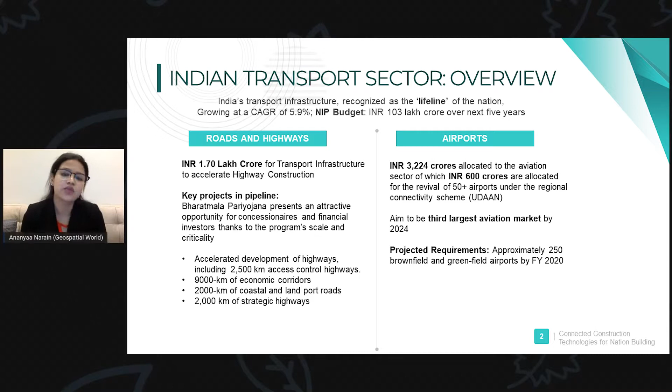Going forward, as part of our research we found several industry challenges. 45% of projects today are over budget, so cost is a major challenge that Indian stakeholders and project owners face. Then 86% of projects are delayed, something we keep hearing about. Apart from that, due to issues in the planning and designing phase, 30% of construction work today requires rework, which takes significant time and results in more costs and delays in delivering projects.

As mentioned earlier, material wastage is one of the core aspects: 25% of materials in the Indian construction sector are wasted, and all of this together impacts productivity, with 55% of Indian construction job sites found to be unproductive. This means quality and productive construction has been a consistent challenge in Indian highways and airports, from project conceptualization to operations and maintenance. Despite its prominent stake and importance to the economy and society, the sector's performance lags tremendously behind other industrial sectors like manufacturing.

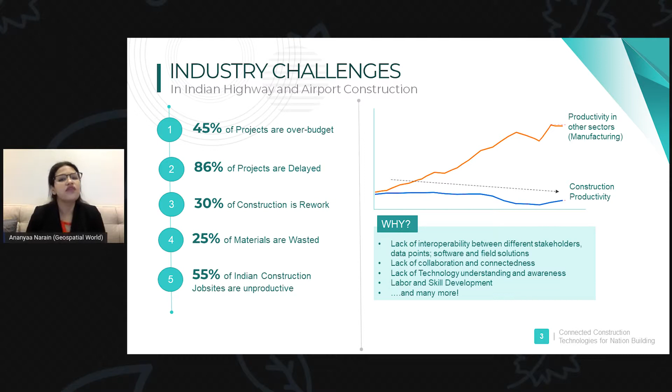So why does this happen? It happens because there's a lack of connectedness, lack of collaboration, lack of interoperability. While technology is one of the core focus areas of the government today, there is still a lack of technology awareness and its value proposition, and of course many other challenges such as skill development, labor challenges, and safety challenges. So all in all, today there is a need for connected construction solutions, or data-driven connected solutions. Next slide, please.

What is connected technologies basically? It's when a data-driven connected technology ecosystem is created, wherein all construction-related information is at one place in real time, available to all stakeholders. This means there's a continuous flow of data, including geospatial data, BIM data, project and timeline data, machine and equipment data, project delivery data. All of that comes together in a common data environment, enabling stakeholders to connect and collaborate on one single platform. That platform acts as a whole system in itself, where collaboration takes place and challenges can actually be mitigated.

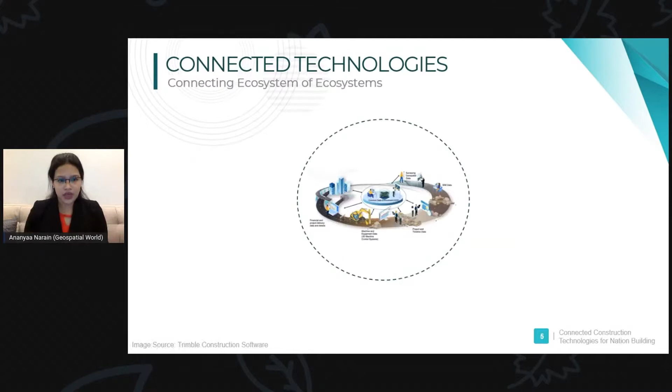But what does this mean? How do the stakeholders come out? We have project owners in the whole workflow of highway and airport or any other construction process. We have project owners, design and engineering firms, service contractors, industry consortia, material suppliers, operations and maintenance people, prefab and modular construction suppliers. All of these stakeholders need to be connected on that one single platform, on that one common data platform, so that decision making becomes easy. And with that, there are multiple technologies.

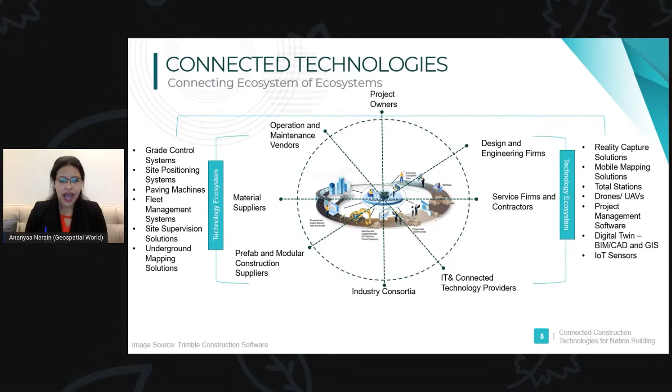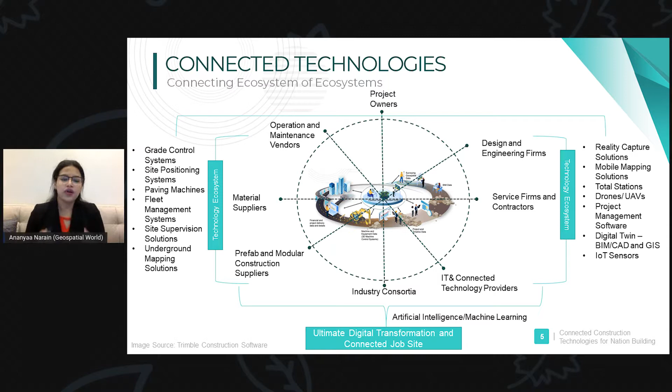For instance, on your right and on your left, there are 3D machine control systems, as well as geospatial technologies, BIM, digital twin, site supervision solutions, underground mapping solutions. Data from all of this comes together and is synthesized using AI and ML solutions to develop an ultimate digital transformation model for the construction job site. So when all of this comes together, connected technology is basically an ecosystem of ecosystems. It's an ecosystem of stakeholders, an ecosystem of technology providers, and all of them come together to make for a collaborative and connected environment.

Now, quickly getting into what the benefits and ROIs are. We have seamless communication and collaboration - that's what connected technologies ensure. There is better and more informed decision making, given that everybody is on the same platform. They can interact, they can talk. There is no loss of data, and decision making becomes simpler. Project delays are less, costs are less, reworks are less. Sustainability becomes a very important component, and there is real-time data sharing and minimization of risk.

Following that, we have about 12% of time savings on using connected construction technologies, about 20% of cost savings, and at least 78% increase in accuracy. These are a couple of benefits and ROIs which are critical, which a stakeholder will derive if they use connected construction technologies.

We live in an amazing place, in an amazing time. Someone should make a highway that floats in the sky. There's never been a more opportune moment to plan bigger and accomplish more than ever before. I think we should live in buildings that change every season. Doing more is the opportunity that the teams at Trimble focus on every day, and occasionally all night. Delivering an ecosystem of construction-ready solutions and services that align all efforts, expertise, and resources available, from survey to design and construction through operation, with continuous optimization. So you can document the unknown, foresee the unpredictable, and assure the best outcomes possible. Because when you have the tools to capture context and share data, you can move the machines. You can remove all the obstacles. You can craft a confident path forward to carry the next plan forward. Someone should invent a way to see the whole world in just one day. In our field, there's only one better feeling than to see a brilliant plan become the next modern marvel. And that's the opportunity to say yes. Yes, I did that.

Hi, a very good morning to everyone. Thank you, Ananyaa, and the panelists so far for setting a great start for the day with crucial insights into the state of construction and infrastructure development related to highways and airports. We're about to begin this session on technology breakthroughs for efficient and accurate architecture and engineering design. I'm Kashi Rajan, Industry Manager for AEC and Digital Cities of Geospatial World.

As emphasized by our renowned panel members in the introductory session, the need of the hour is focused towards precise engineering techniques followed by sustainable solutions, resulting in asset longevity and performance assessment. Needless to say, the adoption of technologies in this regard comes with its own sets of challenges, from digital transformation strategies to human resources required to interweave these technological solutions into the present project workflows. Recent studies indicate that 66% of the construction companies in India suggest that digital transformation and data-driven solutions need to be prioritized.

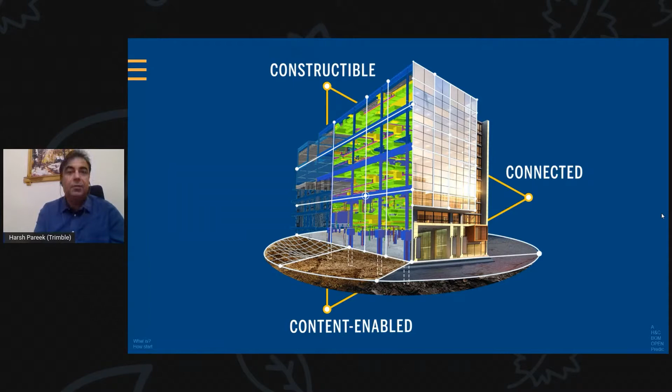I'm just going to share some examples of what constructible means. So you talk about constructible, and let us see a digital prototype of this bridge deck on top. This is a composite structure which has a lot of steel component, a lot of concrete component, and what goes inside it. Like recently I've seen some advertisement saying what goes inside nobody sees, but actually it matters a lot.

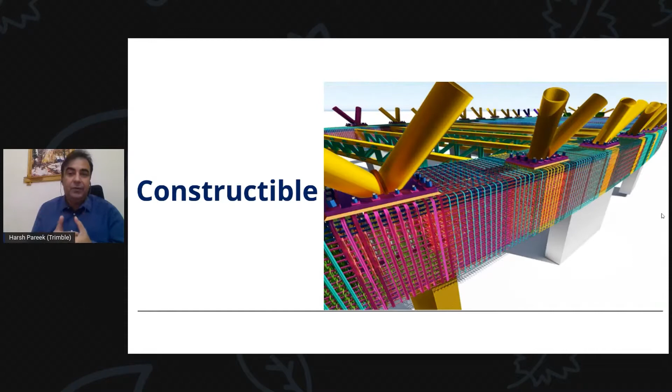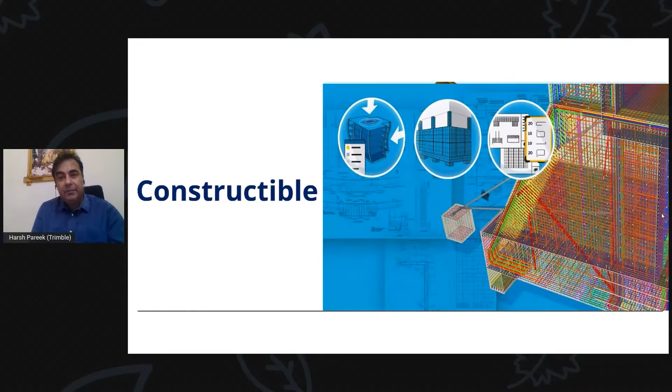So when we say constructible, what it means it is not just about having a 3D model, it is about what goes inside the 3D model, and that is what basically ensures the quality and safety of our projects. So this is one example, and it basically allows us to do all the safety measures, cost measures, and good planning around the execution, and generate the documentation required for proper construction execution.

And that is why we call this constructible BIM. I think BIM is a very generic term nowadays, everybody uses it, but the right way of putting the data across in a construction form is what I call constructible BIM.

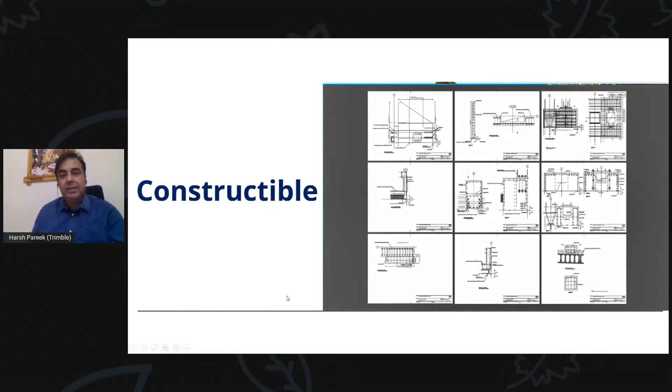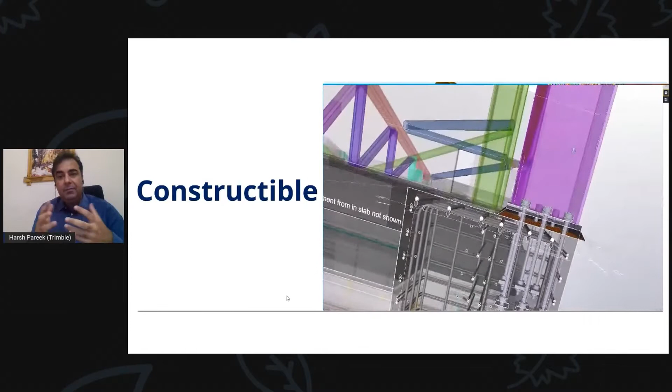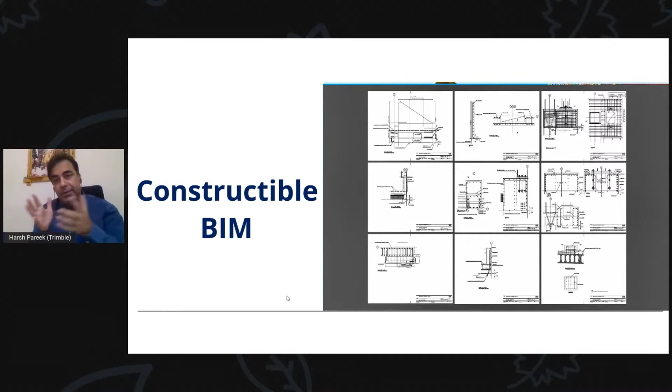BIM alone is being termed as just a 3D model, but the information which is required for execution purposes has to be built inside. We can't just leave them out. So that's constructible. When you talk about content enabled...

In every project we have utilities like heat, ventilation, air conditioning, ducting. You have a lot of structural elements. There are couplers, there are different types of reinforcing bars, there are studs. In bridge construction, there are a lot of elements that come in.

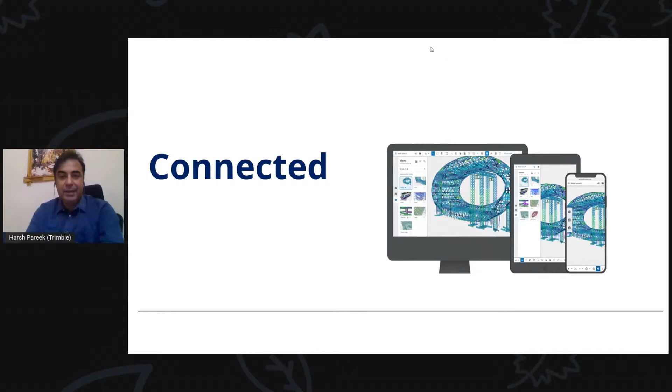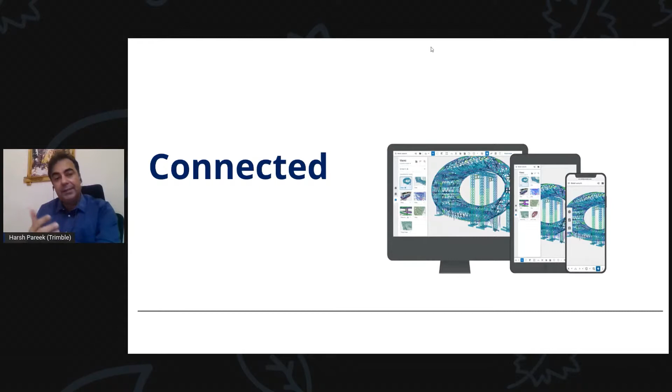What do we mean by connected? The connected means how this information is available. The three pictures give a self-explanatory thing, whether it is a desktop, a tablet, or a simple mobile phone today, the information which is being created at any stage of the project by any of the stakeholders, the connection is there. It can be accessed in any of the mediums available at any point of time. So we call it access anywhere by anyone.

And nowadays, the new technology which talks about this connected information is AR and VR, like augmented reality, mixed reality, virtual reality, where this virtual data you can actually take on site and superimpose this digital information on site. So you can actually see how the things are going to be when the construction happens. So this is very, very important.

Connected does not mean that we are just exchanging our data or emails, but it is exchanging information on any platform for construction and quality purposes. So this is what we call in-field. It is not only about creating the digital model, but capturing the information, doing a complete field visualization, and then sending this information, transposing it on the field with these digital devices.

So Trimble is unique in its nature, providing the combination of hardware, software, and services to ensure that once the projects are conceptualized in this manner, they are delivered on time, with no time and cost overrun.

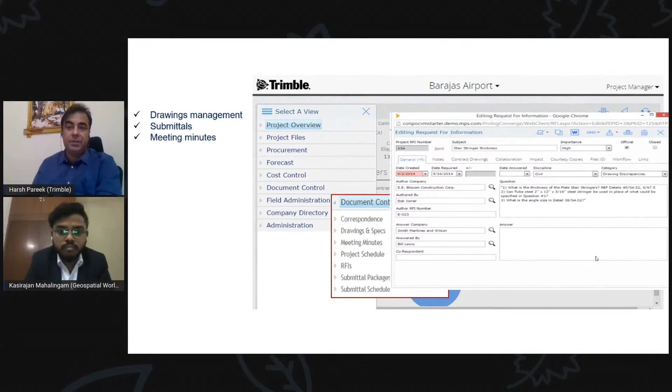And finally, how do you track this information? This is what we call connected lifecycle workflows and reporting, where every information which is created and executed on site can be maintained in an online cloud-hosted application, where you can do complete drawing and document management, manage your submittals, and maintain minutes of meetings across the project lifecycle between different stakeholders.

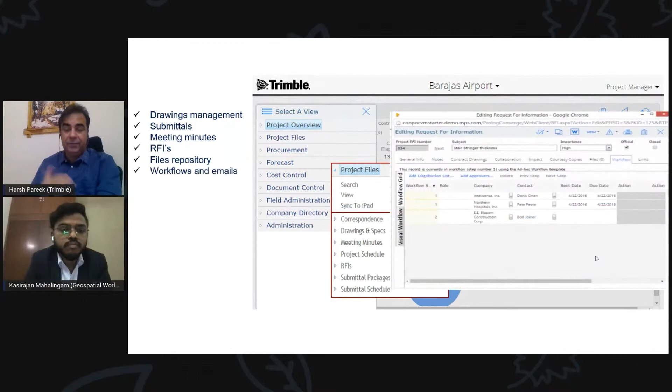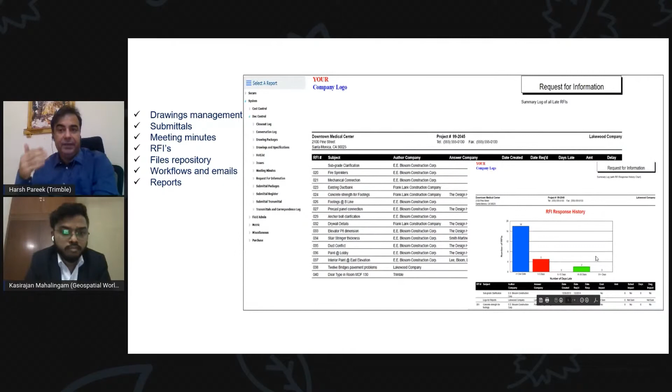RFI management, different file repositories, workflows and emails, that's of course part and parcel of this. A variety of reports on what is happening on site every day, what kind of reports are getting generated to track the status of the project and maintain a complete dashboard.

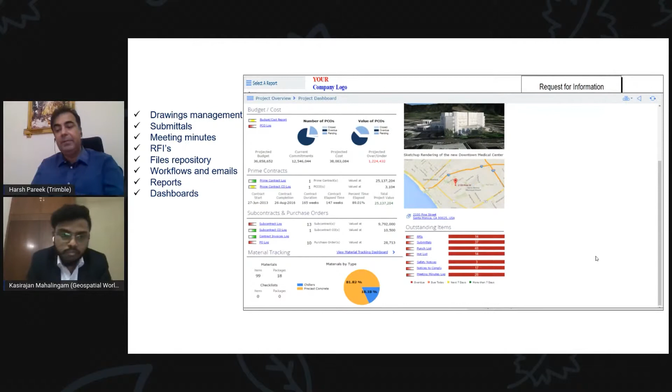This is not about one project. In fact, multiple projects can be maintained in this fashion, so if there are 30 corridors being planned or in execution, this brings a lot of transparency and clarity in terms of execution and how things need to be properly managed. That's what we talk about connected construction, right from concept design to an operation and maintenance perspective.

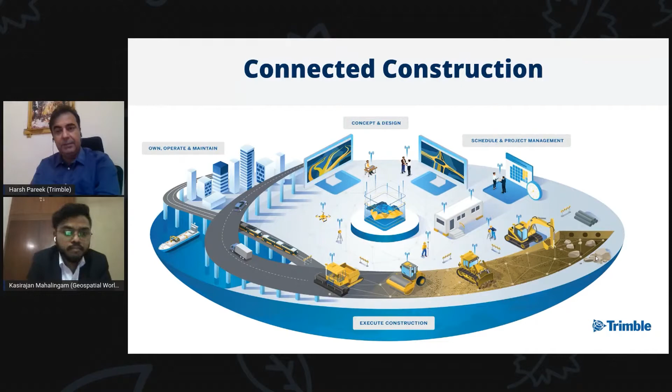There are multiple solutions, but in interest of time, I want to highlight a couple of solutions today, how they help in this connected lifecycle. I'm just going to focus on the preparatory phase of the information. I think in the following sessions, we'll see the machine-based control systems, how this data gets used on site.

First and foremost is the feasibility study and concept. In a linear project, how does the feasibility study today get done? It takes easily more than 4 to 5, 6 months to come up. Mr. Pandey spoke about preparing greenfield corridors today. We are talking about Bharatmala. On the railway side, we are seeing new freight corridors coming, new high-speed rail corridors coming, and these are kind of greenfield stuff.

So how do we prepare this feasibility study? There are 4 components that need to be put together. There's a solution called Quantm from our technology team, which has come up, and what it basically does: you want to go from point A to point B, and there are 4 sets of information we want to combine - engineering aspects, environmental aspects, demographic aspects, and topographic aspects. These are the 4 basic elements, but the information today is available in different mediums and ways.

We can leverage this information, and this is a cloud-hosted system. You want to go from point A to point B, just feed that information, and within hours, not days, within hours, you can come up with more than 100 such alternatives from going from point A to point B. It not only gives us the most cost-effective, but also the most safe alternative. And it's up to us what to choose.

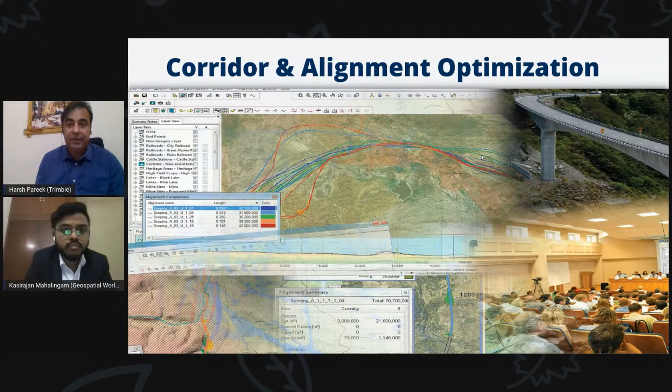That's one. The second thing I'm talking about is TILOS. This is another unique solution for construction schedule and project management.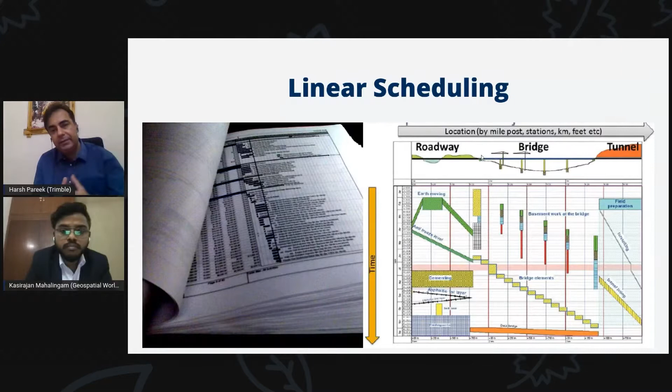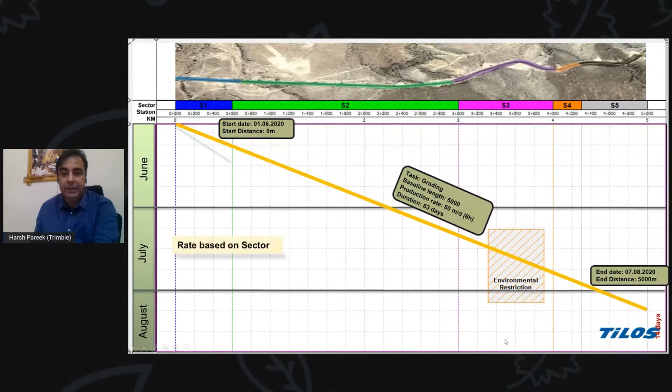So that's here. This basically brings a three-dimensional picture of your project planning. Most softwares plan only time and activity, but here we are talking about time and activity with respect to a location. So if there is some activity being planned at a particular chainage, if we want to finish everything, how this activity differentiates can be easily planned.

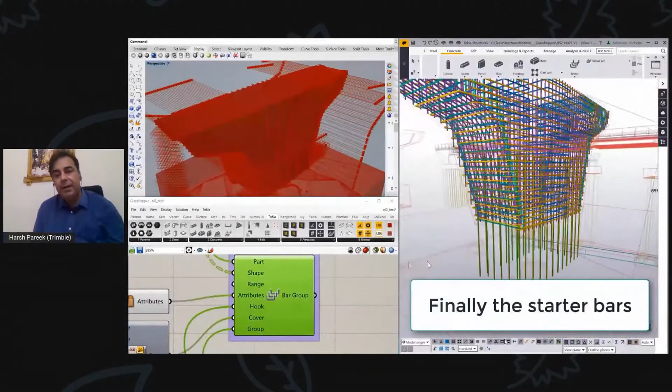The last one is the solution called Tekla. It's an intelligent parametric BIM tool for constructible design. You see how quickly it monitors. This is a simple example of a pier where the reinforcement is very difficult for a lot of people to understand how the bar bending schedules work. But these are parametric algorithm-based models which can be easily populated and give us the complete cost and quantity before execution starts.

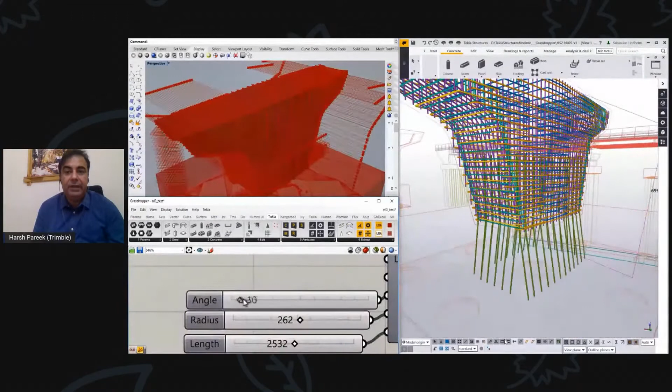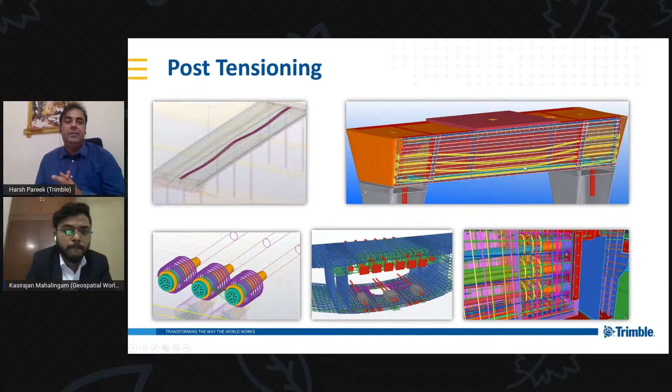And then the drawing is the outcome of these digital models. So we don't need to spend time preparing these hefty drawings. These are one-click outputs we get, and then finally we transfer that to the site.

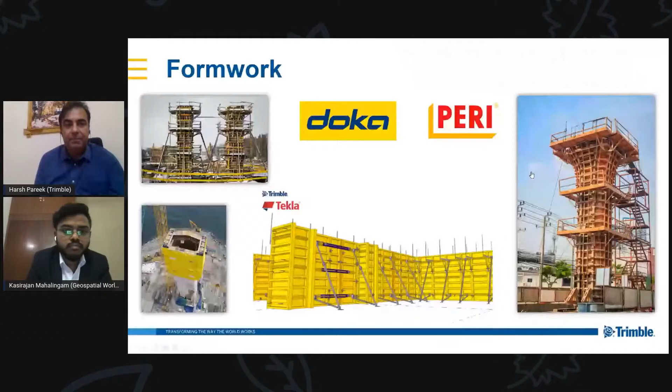So all in all, what it says is deliver with confidence. If we are able to prepare this digital data well in advance and keep transparency across the stakeholders in the project lifecycle, we can really make it easy to deliver these projects without time and cost overrun.

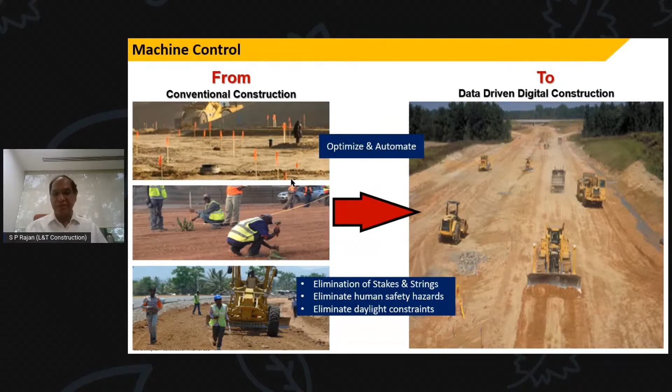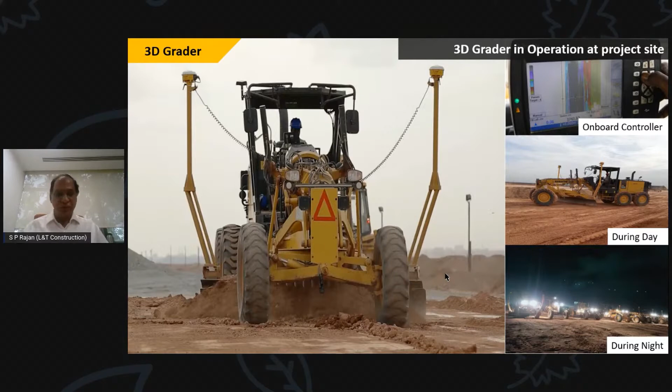One such situation came up where we had to use around 6 graders at a time to grade a very vast area, and within 12 hours we could achieve what would have taken at least 10 days otherwise, right?

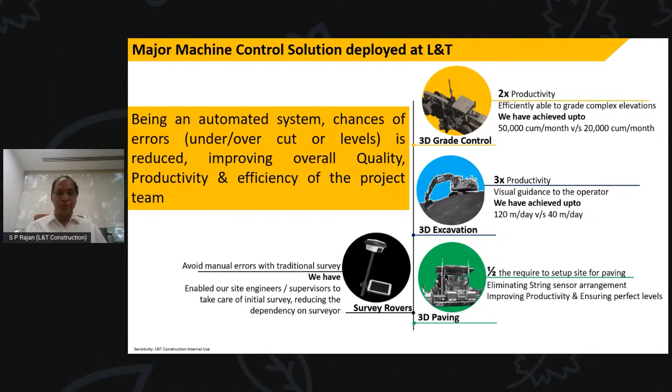Having done this, what are all the solutions we have now deployed at L&T? The 3D control system of grader, I've already discussed that. We have done 3D excavation also, and 3D paving also. So let me take you through the excavation of a drain.

This is the trapezoidal drain which we were doing. We were doing it at the rate of somewhere around 40 meters a day. This has jumped to 120 to 150 meters a day. This is how it is, and the operator is guided by this particular shape which we upload onto the system.

Like Mr. Pandey says, it's eliminating human errors and direct loading of data. By that, he's able to keep the bucket and know how much deeper he has to go and what shape he has to make. He completes that exercise without anybody's help.

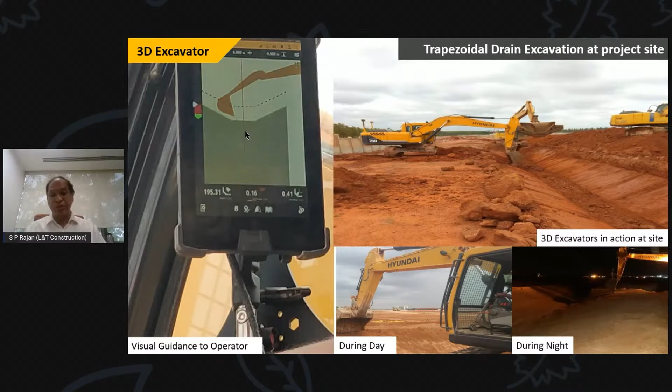Only the surveyor goes there to check whether this has been done properly. Then the paver - you all know the paver takes 2 strings along, and it needs a lot of time to set them up. By going for a 3D system, we don't need to have all those things at site. It's a quick setting and accurate process. So this also has been developed over there.

What are my challenges? My challenges are simple. One is, even though I've been very successful on airports, I'm now slowly taking baby steps on roads. Network is a very, very big problem. We need to improve upon network because somewhere it is catching, somewhere it's not catching. That's one major problem for me.

Another thing is, everybody knows India is running through what I can call the L1 process. So when you introduce all these things, they mean cost, and we are unable to be L1 under such circumstances. And interest among the users - we had to literally sell this particular concept from top to bottom to make them understand that this has got benefit. So the interest used to fade. People who have used it are comfortable, but people who have not used it need to put in a little effort in understanding this and facilitating people to use it comfortably.

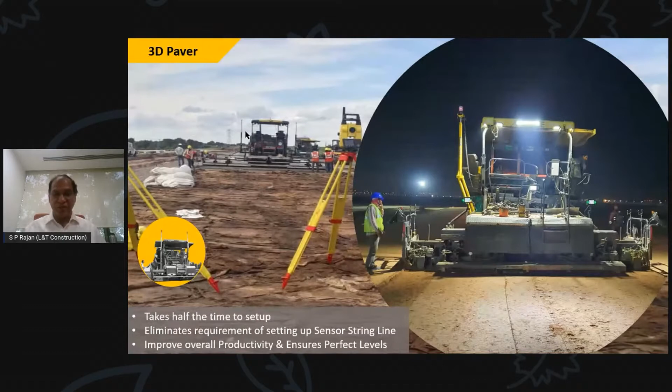Finally, they all say, I've been doing it like this - this industry has been like this for the past 80 years. What have you guys come here to teach us, just take this away. It's wasting my time, you've been sitting for 3 days and nothing has happened. So that patience is not there among the people. And finally, sustainability - okay fine, I'm using it today, but can I use it tomorrow? Will I be able to use it for the next 5 years? These are certain challenges I do face, and we overcome them successfully.

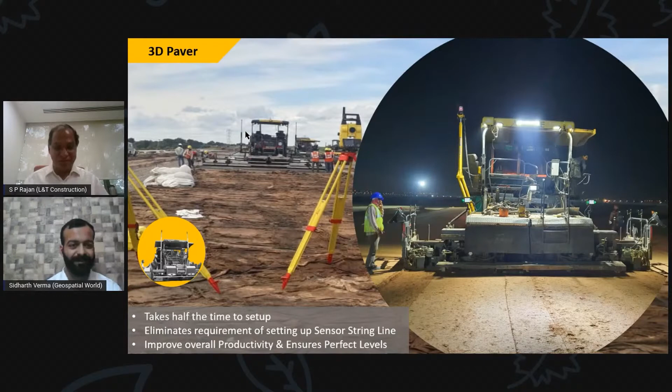You wonderfully explained with examples how we have innovated ways with mix and match to make use of technology in an efficient way, and how we are moving from conventional practices to data-driven construction practices. Thank you so much.

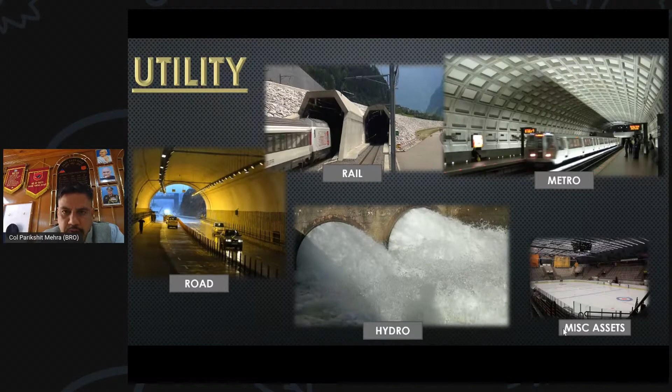I'll very briefly cover the challenges being faced by tunneling and underground structures construction in the country, and the relevance of data-driven technologies to such type of construction. Today tunnels are very relevant - relevant to roads, to rails, to metro systems, obviously to the hydro industry, and to a lot of miscellaneous assets being created across the country for security purposes, sometimes because cities are now short of space. So underground structures are today very, very relevant.

We popularly say in our field that the future is truly underground. But what ails it right now is that it's a very diverse field. Even if we see the geotechnical environment - shallow tunnels, which would be metros, subways, roads, road tunnels or rail tunnels, they will generally be made in soil. The deep tunnels would be highway tunnels in the Himalayan region, in the north and northeast regions, and also for hydro projects in these areas, constructed through rock. Now these two geotechnical environments have a very different behavior. These are two different ball games altogether.

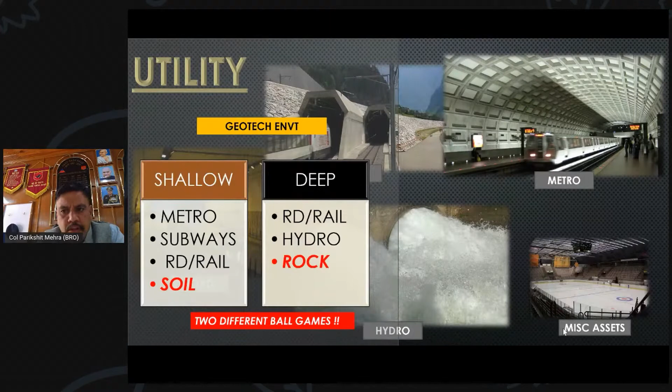The way to approach underground structures, from design phase to execution to monitoring and operating, involves different sciences altogether. Coming to excavation means, today for underground structures we have mechanical means - metro TBMs, tunnel boring machines, earth pressure balancing machines, slurry machines are available. We have some excavation happening through road headers. We are also using TBMs for deep tunnels.

The experience in the country as of now hasn't been very great, barring one or two projects, but the technology is improving, and more TBMs are coming for deep tunnels as well, especially as the railways forays into more tunneling in the north and northeastern regions of the country.

Drill and blast again - the technology is basically using drill boomers, explosives, blasting and mucking, majorly used for deep tunnels. The Atal Tunnel, where I was director, we did that complete 9 kilometers under 2 kilometers of overburden using drill and blast. Metro systems, the cross passages would generally be drill and blast. Some amount of drill and blast technique or the New Austrian Tunneling Method would always be required to induct the TBMs themselves, so this remains relevant as well.

Obviously, in a complete project making the right choice is very important. Tunnel boring machines or any of these major mechanical excavation equipment are expensive, and we have to ensure that when we get them on site, we have utility for them and are able to complete our projects with them. So making this right choice is very important, and this choice has to be made in the phase of investigations, explorations, and making the DPR, so that contractors, when they end up doing the work, get the right equipment on site.

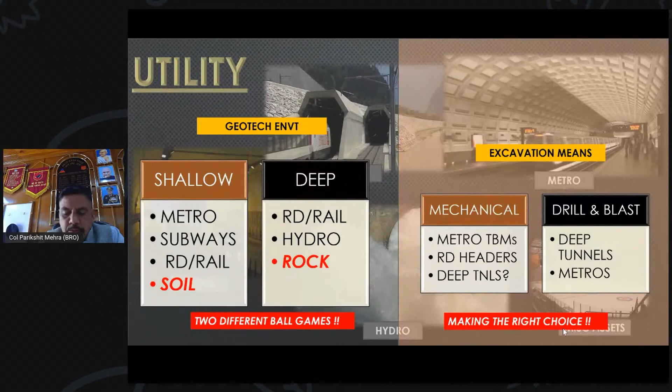Shallow tunnels in soil are slightly easier for exploration because we are talking of shallow overburden depths. We can pick up the data easily. The area is generally accessible. There are lesser risks comparatively. Scope for damage control is there because these TBMs, even if they were to get stuck somewhere, we would be able to take them out by doing shafts.

The strata itself is semi-infinite and nearly isotropic, so analyzing that data, designing is easier. We're basically designing on overburdens, on the tunnel boring machine itself and on the opening. It's more of a structural design.

Utility mapping, yes, is a major challenge, especially in the cities. Delhi Metro, they've been surprised with so many things when they were doing excavation in the early phases, because it was very difficult to map the utilities which were already there underground.

Deep tunnels, obviously the exploration is complex because there are accessibility issues. Even in Rohtang we had boreholes, but boreholes were generally close to the portals - the mid reaches were not accessible, nobody could have taken up a rig there. There are larger unknowns in rock in general because it's a much more heterogeneous medium, and then there is higher risk.

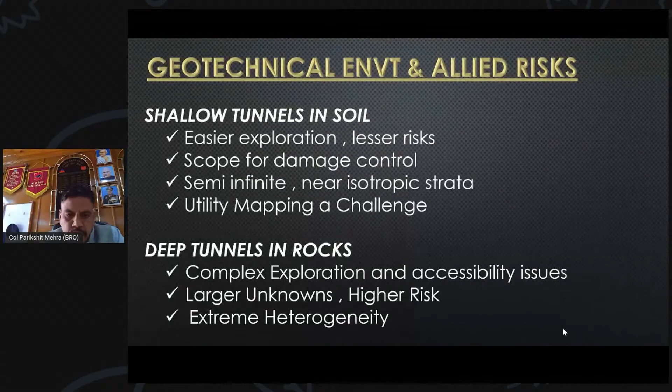There's extreme heterogeneity in the type of rocks because we are in the Himalayan region, and we understand that the Himalayas are in a subduction zone. We are tectonically active, so that adds to the challenge. Basically what I want to bring around is that when we are doing tunneling in our north and northeastern parts of the country, there are a lot of unknowns in the system, and that is a challenge.

Now with the experience that we are having in tunneling over the past 15-20 years, we need to collate the data, collate the knowledge that we have, so that we can do slightly better. There is diversity in forms of deformability of the rock itself, because there are various types of metamorphic rocks. Most of our rocks where we are doing tunneling today in the country are metamorphic, very difficult to predict them. There are issues in actually predicting the correct discontinuity patterns, doing proper stereographic projections and all.

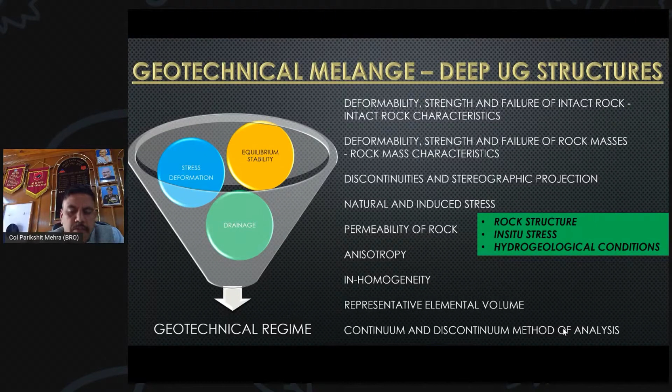To actually measure in situ and induce stresses in the area becomes difficult at times. There is an anisotropy and inhomogeneity within the medium itself, in the intact rock itself at times. And then we add to it the Himalayan geology, where we have a mountain range which is moving up 4 to 5 centimeters every year. So there are a lot of unknowns, but there are solutions.

We end up today using solutions from across the world, where we use some systems from Q systems or RMR systems. These are technical terms, would be known to people who come from tunneling backgrounds. But we must always realize that these systems are also based on case studies which were either in the Norwegian region or in the African deep mines.

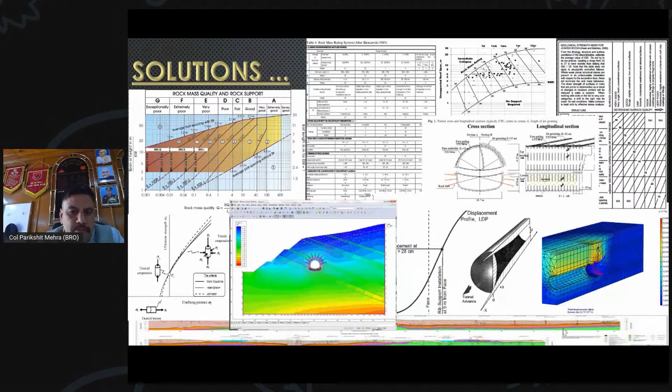And when we try and use them in India, we must be careful, because our kind of rock will never be akin to what was found in those regions. So what is the best way ahead?

Best way ahead is to do a proper scientific exploration program. Use geophysical methods. Today we are using aerial methods as well, where we have airborne EM surveys being carried out. We are doing borehole investigation technologies. The best way to do it is to do it much before the project is to start, so that we get time to actually do a proper investigation campaign.

Because most of the times these investigation campaigns end up being pushed because the project is required to start very early. So we must start these investigation campaigns at least 4 to 5 years before we want to actually start doing tunneling in the deep tunnel range in the Himalayan region.

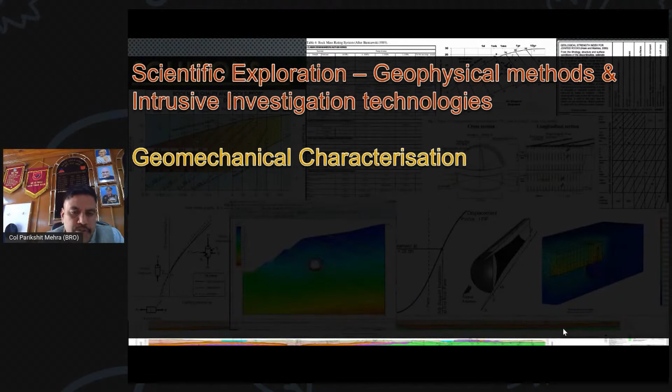Then we need to get to geomechanical characterization, which means that we need to characterize a rock based on how it is likely to behave when we are excavating, and how can we support it with what kind of support systems. We need a robust preliminary design, so that our contractors can bid fairly. And we have to give them a tender with a baseline where we tell them that this is the geology that they should expect, because it is very difficult for a contractor to mobilize the kind of resources we need to mobilize for a tunneling project without having good data and without having a good baseline.

We have to realize that if we have to take on tunneling in the difficult regions of the country, we as clients in the government will have to share the risk. And that's why these baselines are very important. We have to give our contractors a geotechnical baseline. If the geology is worse than what was given in the tender, then the client will have to take the risk.

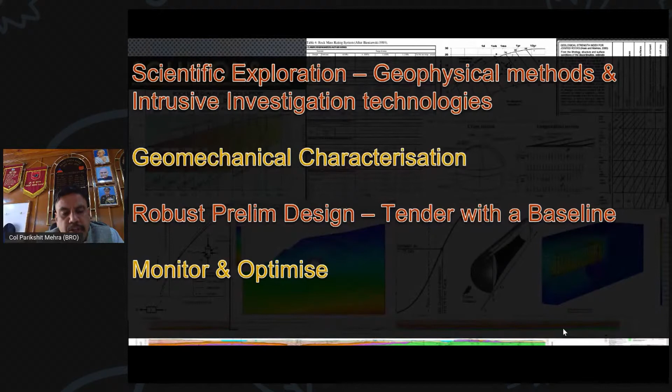Subsequently, when we are actually doing tunneling, we need to monitor. We need to do deformation monitoring, and we need to optimize the support systems as per the rock that we encounter. Only then will we be able to do an optimized tunneling practice. Otherwise, we will end up always putting in more supports than what is required, or pushing too much risk towards the contractors and make most of our projects untenable.

Now, where is the relevance of data and automation in these systems? I'll bring out some points which I think are very relevant. Preparation of DPRs, investigation and exploration. It is in this phase that you decide as to what is the alignment, where should the adits and shafts be.

See, any segment of deep tunnels which is more than 3.5 kilometers is very difficult to ventilate even during construction. And even if we end up making these long tunnels, we have to put in a lot of operational cost to ventilate them. So this is the stage where we need to analyze this properly, and this is where probably good survey techniques should come in handy.

At this time we have to give out the likely project time, because in tunneling projects there are a lot of overhead costs that the contractor has, and we need to correctly predict for him the number of years that he would be required to keep his setup there. So this phase is extremely important.

We need to find out if there are more attack points, because that means that we can start at multiple points and probably we can reduce the overall project time, and also probably cut the tunnels into smaller ventilation sections. We need to give out the equipment to be used, which a DPR consultant should be able to suggest, so that we get the right inventory and the right equipment on the site, because most of the equipment being used for tunneling are expensive, and there is no point of having an equipment on site which you cannot use after a certain phase.

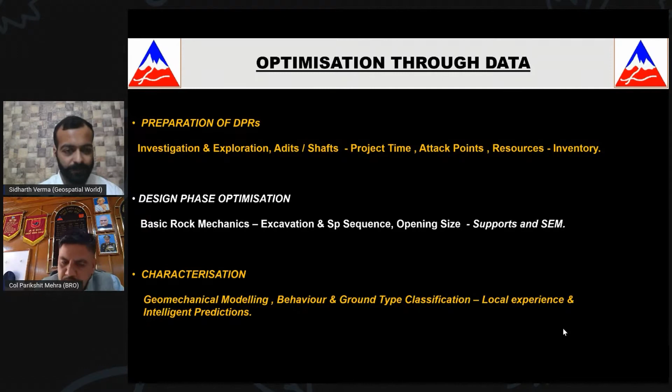Doesn't matter. Characterization and geomechanical modeling I've already covered. It's important that we take in local experience and intelligent predictions. We need to collate data, but we don't share data in the country. That's a major issue.

Construction phase, observation is very important. Without 3D monitoring, you cannot optimize supports in tunnels. So 3D monitoring is important, which can be automated very easily with motorized total station equipment, which can pick up deformations and tell us if we need to reduce or increase the supports.

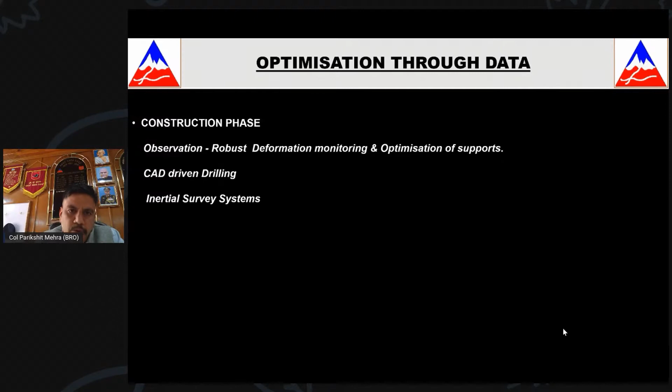CAD-driven drilling, when we are using drilling jumbos, inertial systems, because non-magnetic systems are important. In the contract phase, understanding advance rates and time-related costs is important. I've touched on this before as well.

Finally, in the operational phase of the tunnel, deformation monitoring continues in a lot of sites when we are not too sure about the stability. For fire safety and traffic management, we need to pick up the environmental data if the smoke, carbon monoxide, or NOx gases are as per the required health norms or not. All this needs to be SCADA controlled.

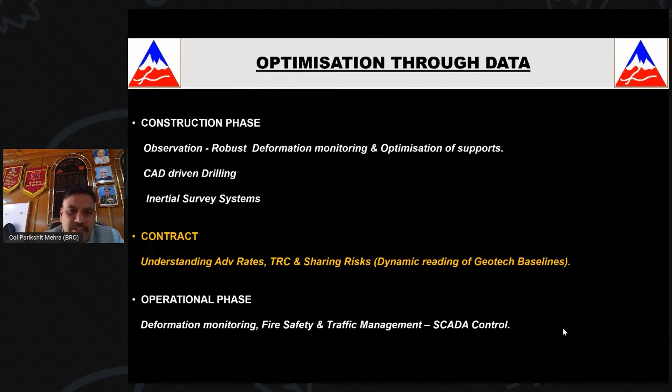So there is so much scope for automation and data-driven inputs in the tunnel, from the exploration phase right up to the operational phase. To be very honest, I don't see much available today in the Indian market for tunneling as such. I'm done with the presentation. That's it, thank you.

Thank you, Colonel Parikshit. You briefly explained the challenges of tunnel systems and how the future is truly underground. We'll explain how, with such uncertain geological situations, using physical methods and aerial methods, we can optimize the tunneling process. Thank you so much.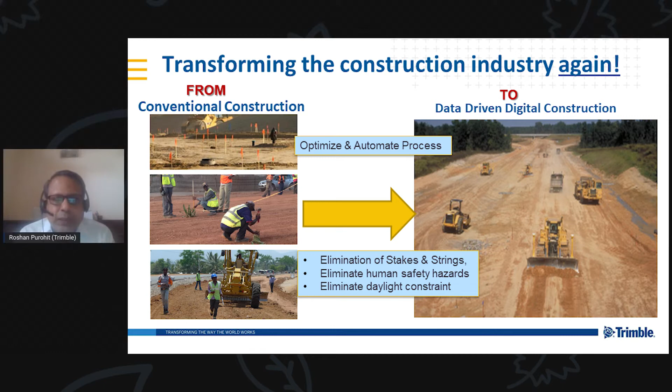So typically, on one side, there are a lot of people telling expensive machines and expensive tools what to do. On the other side, technology is making the machines and assets intelligent enough to understand what is expected out of it. So the basic question is, which system is more profitable and more efficient?

Now coming to connected site, when we talk about data-driven digital construction, connected site is at the heart of it. As the name suggests, connected site solution enables communication and connectivity between office and designers with field staff and machines, to push design data and design updates, and receive progress reports and as-built information. So it's a kind of two-way communication that we are talking about here.

The connection or communication can be between the office crew and just one machine, or with multiple machines operating at one site or at multiple sites. Connected site solution typically enables data management and data supervision and control across multiple sites, bringing information back to the office, which can be used in dashboard form to provide information to managers for project management purposes and advanced decision making.

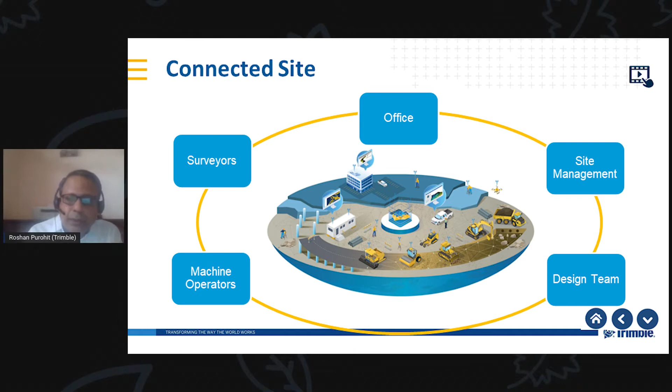As Harsh mentioned, constructability is key to any construction. So it's like we are also talking here about a kind of horizontal BIM process, by creating a 3D digital model out of the existing design data that is available. So if the design data is in digital form, then it's fantastic.

If it's not available in digital format, if paper design is available, still we are able to create a 3D digital model. And that model we use across all assets working in the field—maybe a survey tool, grading machines, compaction, paving—whatever machines or assets are being used, it uses the same digital model across stages, across the process.

And the benefit is that, when we are working in this ecosystem, in this process driven system, there is no gap in between the stages, and there is no error or no data loss.

One example can be like the grader with technology using this digital model, grading at a particular level at one site, at the same time generates the as-built information, and that as-built information can be shared with the office, where the digital model gets updated, and this updated model can go to the survey tool, which can be used by the surveyor to do a QA/QC analysis, or to create a cut and fill map, and then this updated information again can be synced back to office to create the 3D model, and the updated model again can be sent to all machines working at the site.

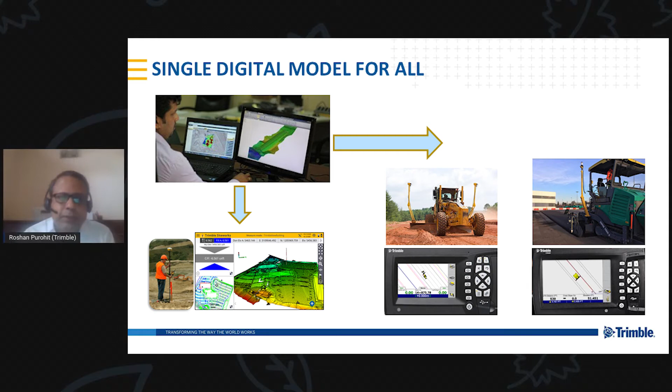Looking at the technologies involved, the first one is 3D machine control technology on graders, as Mr. Rajan mentioned in his presentation. Basically the technology installed on this grading machine, which can be a grader, dozer, or excavator, or any grading machine, controls the slope and depth of the blade and positions the blade very accurately at the right level, using the design information.

Here in this process we are focusing on faster production. All the grading cycle or earthwork cycle, we expect production to go up by 2 times, while maintaining accuracy to the tolerance level.

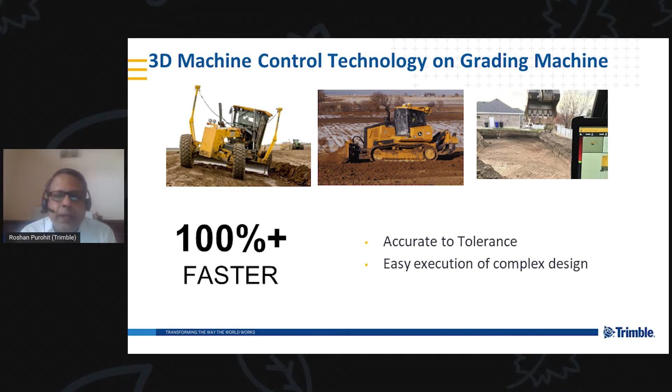Since no manual guidance is required, this grading machine—or any construction machine at site—can work with the same efficiency, same quality, speed, and ease of operation at night as well, further enhancing productivity and asset utilization, making the ROI much faster.

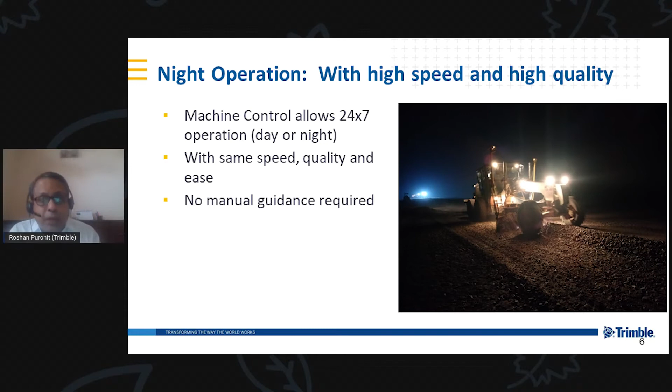Because I'm hearing a lot about cost, it is all about ROI. In the Indian market, we have come up with our own experience over the years that today we say the payback time can be 6 to 9 months on the investment of this technology. So it can be very, very fast.

Then similarly, coming to 3D technology on compaction and paving, here typically we are focusing on quality. Like on compaction, we can ensure the right number of passes, thus avoiding over compaction and under compaction.

Similarly, on paving, we ensure smoothness, rideability, right layer thickness, etc., to ensure the design standards are met.

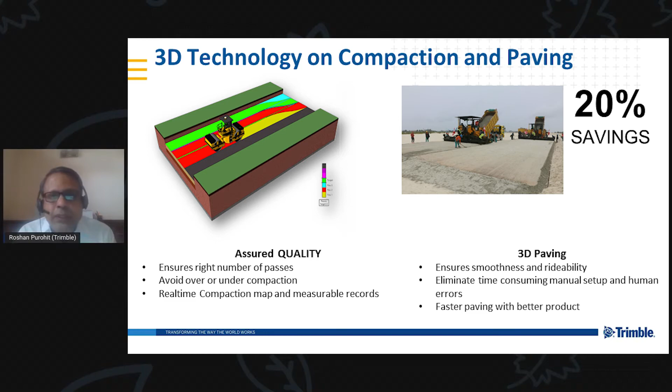Now, when we talk about design and grading, we cannot keep away the survey tools from the equation. So we talk about survey cycles as well. There are specially designed survey tools around to cater to the harsh construction environment, and to offer the most accurate positioning that is acceptable to the construction industry. Here again, this tool can accept those digital models to provide control and a reference of the site.

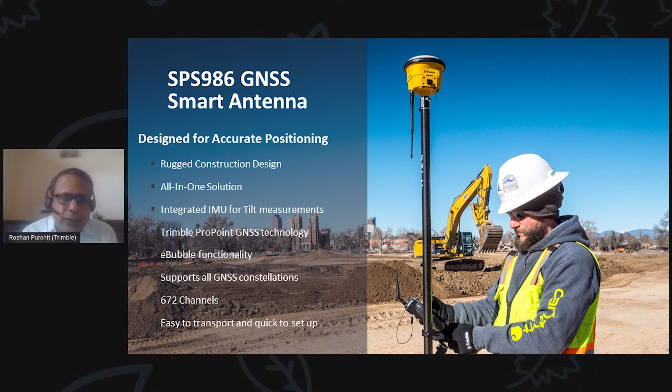Last, not least, the suite of softwares—these are extremely important. The office software like Trimble Business Center helps creation of the model, mass haul, takeoff, those kinds of applications. Then the cloud-based software like WorksOS, WorksManager, not only facilitates communication between office and field, but also facilitates reporting back in a dashboard format, or the as-built surface information.

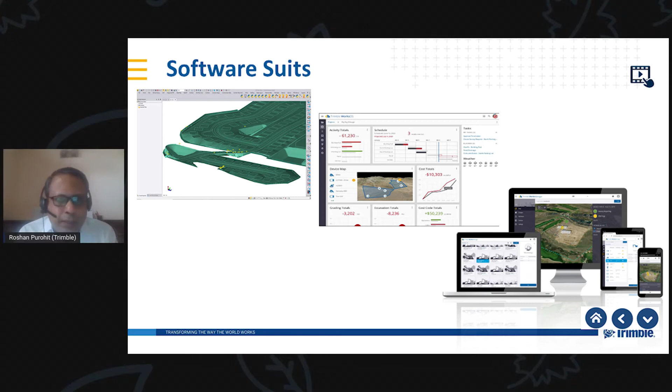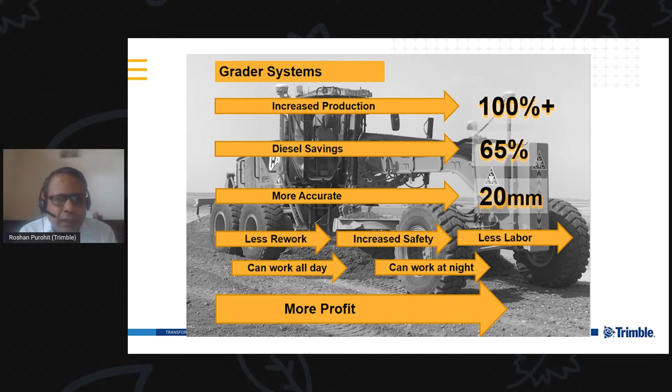And similar outcomes we can see on other machine types like excavators, pavers, and other machine types as well. So all put together, if we go for a site-wide implementation, our benefit is much more. In this case, we are able to say that a certain percentage of the project cost we are able to save.

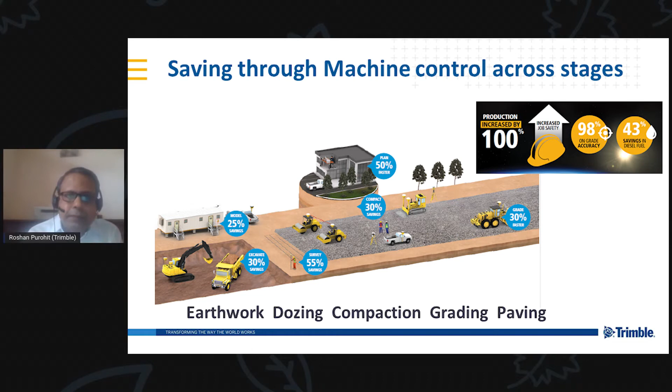That percentage can be extremely significant, helping contractors or owners improve the bottom line. So just highlighting a few advantages or benefits that we bring with connected site and the technologies involved, for owners it is faster and on-time execution, reduces project cost, collaborative execution of design, higher quality layer thickness, rideability, compaction, and creating digital records for audit, future planning, expansion, etc.

I was hearing Mr. Pandey talking about a lot of expectation, and I believe as an industry we are able to support that. On the contractor side, we talk about faster production, higher accuracy, early completion benefit can be taken, lower cost of production, day, night, all-weather operation, higher utilization of assets, higher return of investment, less rework, less wastage of material. So overall, as a technology provider, we ensure not only we provide the point solution and the benefits around it, but we bring connectivity across functions, across machines, across activities.